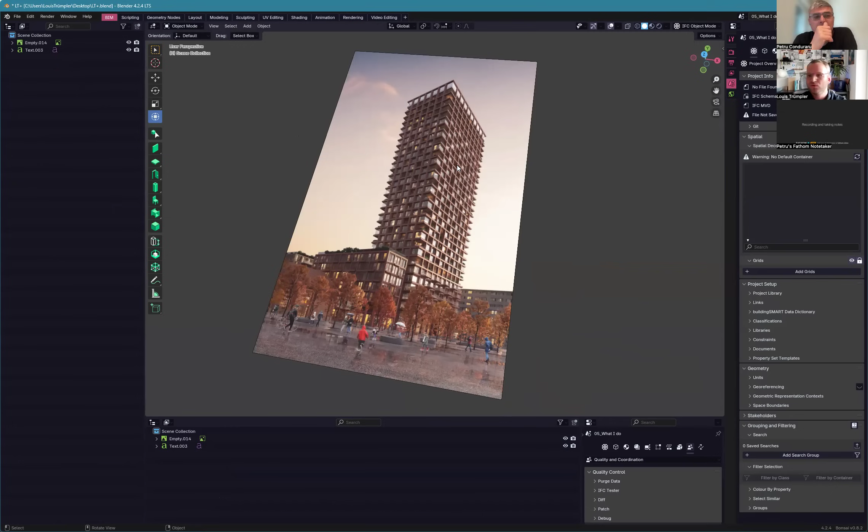But I do still work on some pretty large scale projects, not always involving Blender. But especially when I do BIM coordination and when I have to work with different models, I do like to involve Blender.

That's amazing. Some stuff is loading. I do work on some stuff that's not, I would say, inside Blender, but that's adjacent to it.

I've put a QR code so people can try it out if they want to. You can scan it with your phone to get to an app. It's a live site. Let me try, let's see if this works. Inception inside Blender, Hack LT plus CH. Okay, there you go.

What do we do here when I have to load the model? Do you have any models in the library or do I have to upload one myself? You can upload one yourself. It stays on the client side, there's no backend or anything like that.

And what it does is it basically performs ray tracing. Ray tracing is this concept where you can find out where there's adjacent stuff or even clashes, and this is for the timber industry.

So it was part of a hackathon, but it's built around finding the intersections between different model parts, because those are actually quite interesting for the timber industry. On the construction site, they have to connect these two things, so there's usually cost involved and they have to schedule that.

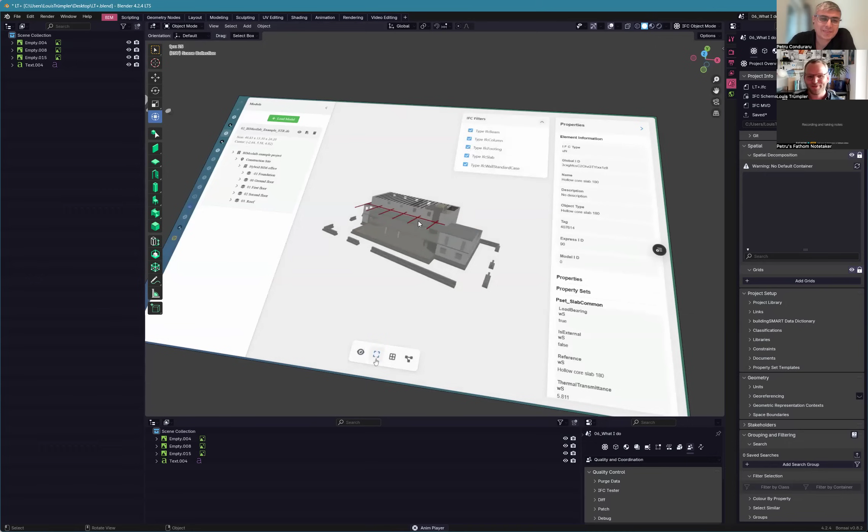Yeah, it's much easier nowadays with all these things, and training like Bonsai Bootcamp helps you get there in a few months, a few weeks, if you show up. So you say something interesting - 8 years, did you start using IFC OpenShell before Bonsai was published by Dion?

Yes, actually I started using IFC OpenShell before I used Bonsai, or BlenderBIM as it used to be called. At first, Blender was mostly like a user interface for IFC OpenShell for me. But that has changed quite a lot, especially since I don't work at Walt Galmarini anymore, where I had access to all the licenses.

Okay, let me share my screen. Don't forget this idea, it's important to continue it. Never mind, Blender has crashed. Well, part of the life.

At Walt Galmarini they have all the shiny BIM tools and all the licenses, but for myself I think it's quite nice to have free tools actually that are free to use. I've started using Blender more, and I've actually started modeling stuff with it - in Bonsai mostly.

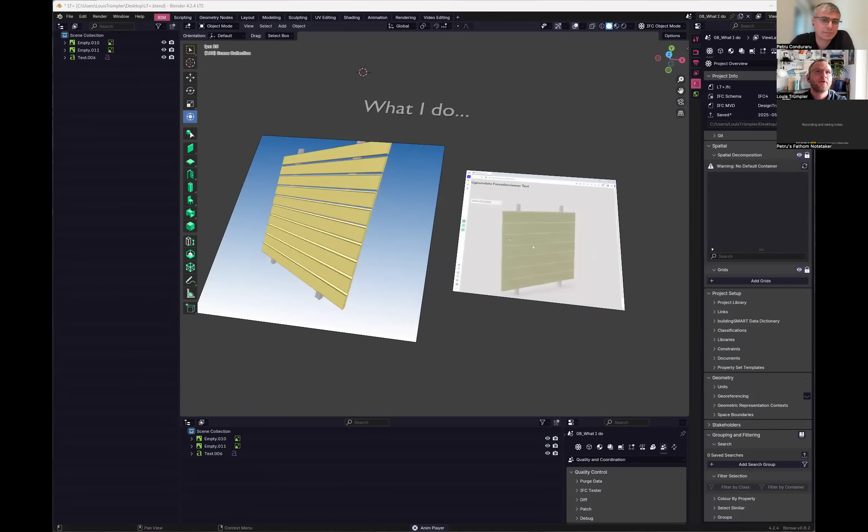There are many people, unfortunately, who just take, not even recognizing that they take. I don't want to be negative, but it happens. I am aware of that. What I'm also aware of is that I'm in a pretty fortunate position, so I do feel like I can share stuff. I can even, for the most part, decide what I'm working on, and so I like to share if I can.

What do we see last here? I'll actually show how I modeled this. That was a project for the Swiss timber industry with many different facade types. I wasn't aware of it, but those facade profiles are standardized, and there are like 150 profiles or something like that, corresponding to a physical tool that can make this shape out of wood in factories in Switzerland.

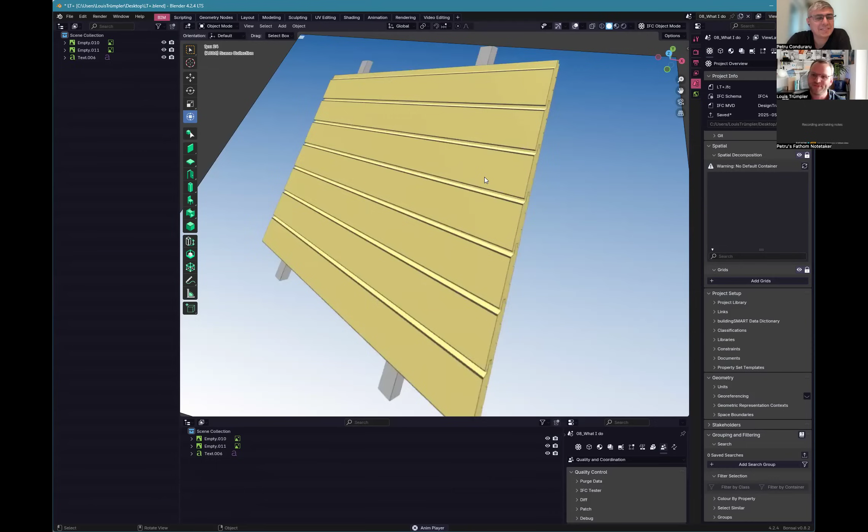The Swiss timber industry, actually Lignum, they're called, this organization, they have an online catalog of this data, and they asked me if it would be possible to have digital representations of their facades, and also nice pictures of the section cut. I immediately knew this would definitely be possible with Bonsai, easy, piece of cake.

I made them a good offer because I also knew I would be able to automate it quite a lot. So we produced 150 highly accurate facade models that can be downloaded on their web page now. They have a huge catalog.

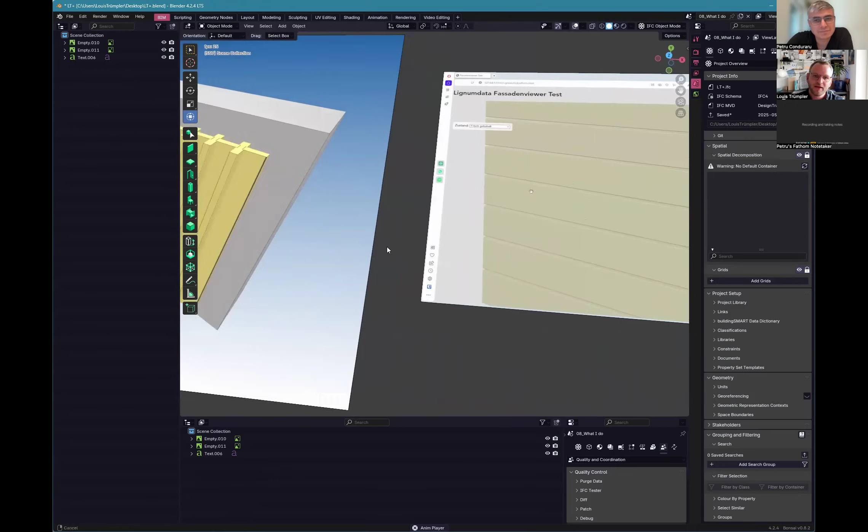The follow-up project isn't really progressing, but that's okay, I keep thinking about it. It's like to have a 3D viewer where architects and owners can look at the facade, and then we have a dropdown where we have a fake weathering effect.

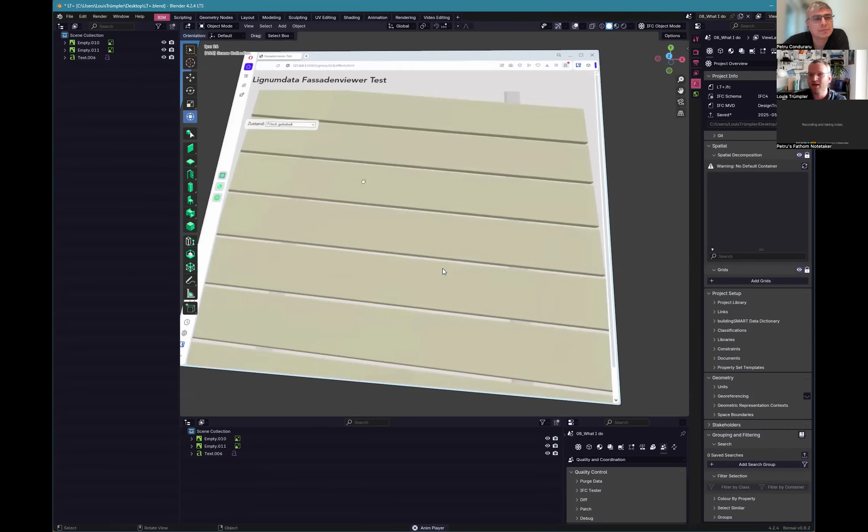It doesn't really look good here, but the concept would be to see what your facade will look like in 10 years. There are different ways to treat the surface, and those treatments have a high impact on how it's going to look in 10 years.

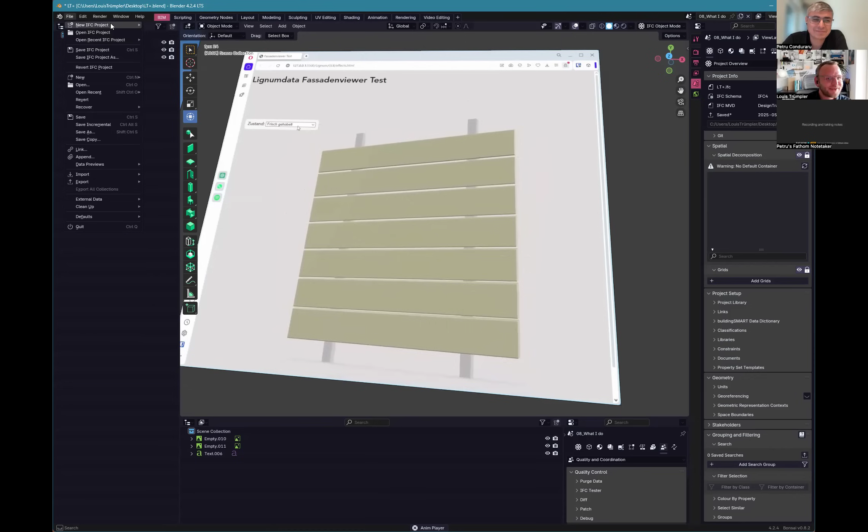It's quite cool what you can actually visualize there, but it's more for architects or visually inclined people. I feel like I'm already showing stuff for too long, let's jump into some actual projects.

What I wanted to show was first how I created these facade models. It crashed again I guess, and the screen share stops automatically I guess.

While you're starting this, what do you think about who Bonsai could be useful for in the AEC industry? Who could use Bonsai?

I feel like there's a pretty broad spectrum actually. Starting with owners might be a bit counterintuitive, but having a free tool is actually worth a lot if you don't work with BIM every day. There are what I like to call serial builders because they build one project after another. But most owners are not building multiple projects, and if they want to use BIM, having accessible open software I think is worth gold.

Then again, I start to see more adoption in the classical AE, architects and engineers. But as we all know, our industry is kind of slow to adapt. Where the benefits are very clear, even today, is around management and coordination. As much as I like modeling in Blender, what I'm showing now is not an everyday job, even for me, I'm not doing this every day.

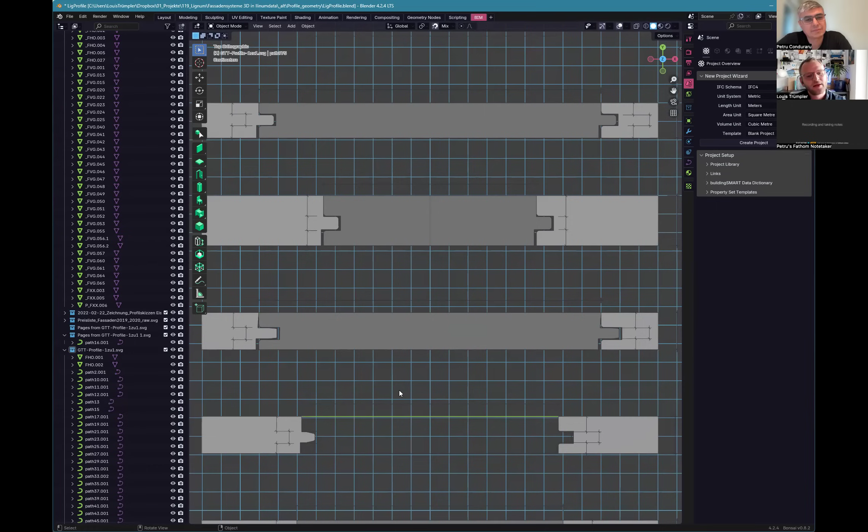But I realized that what we're looking at here is a profile, and IFC has this concept of profiles. So if we have a steel beam, it can have different underlying IFC profiles that give the shape. And I realized, how are these timber facades different from steel beams? They're not, and they should use the same approach.

I wasn't able to do it with pure Bonsai BIM tools, maybe because I didn't dig deep enough, but I think it doesn't actually exist. So I wrote a script that converts these curves into extrusions. Then I also created arrays of these extrusion elements, so that in the end I was able to generate those timber facades pretty much automatically, but still with some light afterwork.

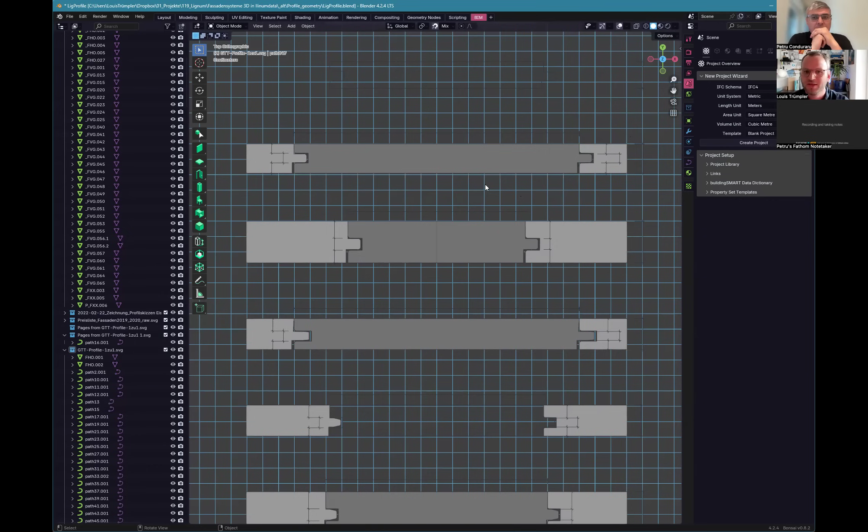I think it's cool that you can have add-ins in Blender, so I also started building an add-in for that so I don't have to run the script each time. After some more work, what I get is these facade parts, consisting of different claddings. I think it's really beautiful how the IFC schema has these concepts that then get applied in Blender and in Bonsai.

One of those concepts is an array - so that's actually an array inside the IFC schema, and it's quite crazy, you can edit it. If I go here and set the array to 17, you can see how the array happens. I could save that as a new IFC now, and it would be perfectly valid.

As you can see, I opened the IFC project because I saved them as IFC, and then I can just open them from here, and I have those facades, all arrays. Arrays can go in multiple directions - here you can have only one profile that you arrayed in two directions.

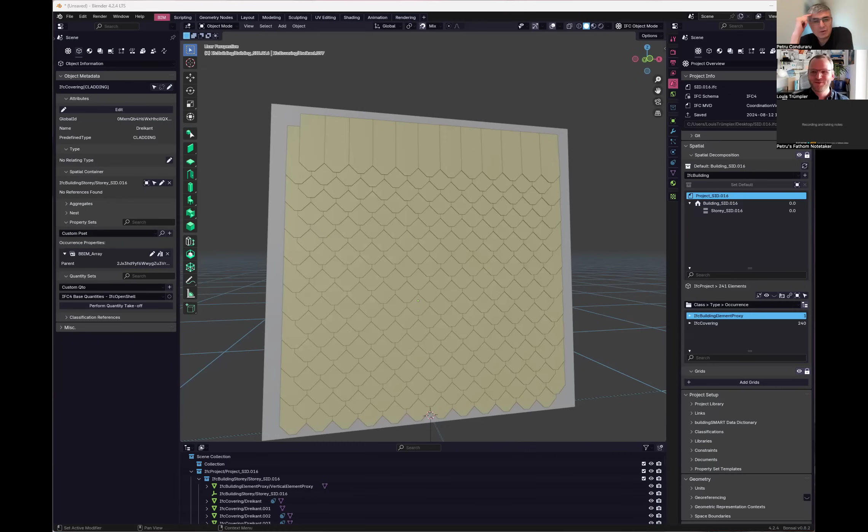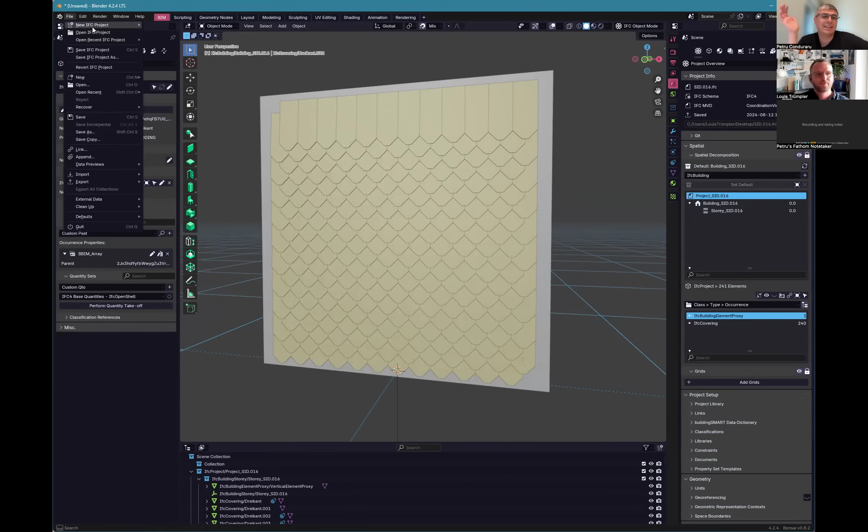It should only be one profile, and that should be referenced, the IFC way. Those files are really light. Yeah, but this sounds amazing in practice, theoretically at least. But this works when you use Bonsai as an IFC authoring tool, or an IfcOpenShell. You cannot expect this if you just export from other tools. I don't think there exists any other tool that comes even close to emulating it. They are emulating the IFC schema and supporting it to that degree.

You can export like an array.

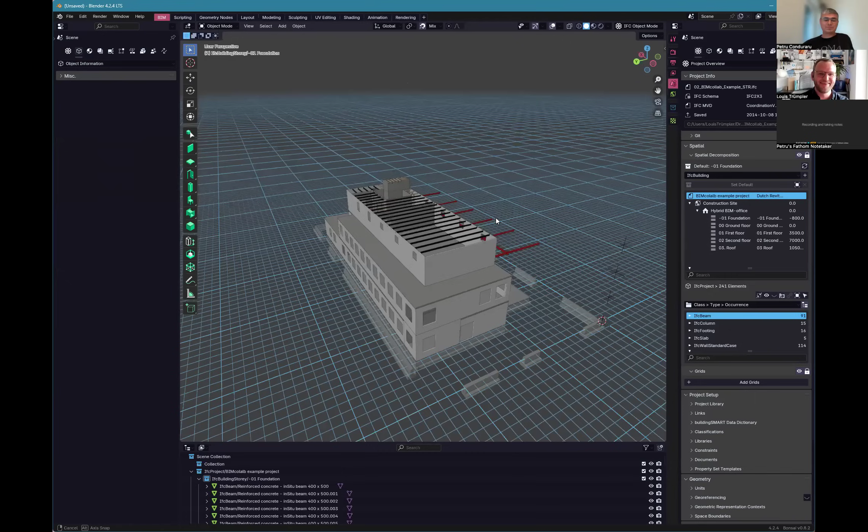That's an excellent segue into the next topic I prepared. Don't worry, it's the last one. It's around BIM coordination and management.

I unfortunately can't show any live models, but I do like to work with the BIMcollab ones. I don't know if you know them, you can download them. I quite like it because those are real models from Revit, and you can actually see some stuff there.

That's not an insult on BIMcollab, that's just the way it is, and I think it's good that it's like that, because if you work with sample models and they are perfect, I think it's a bit critical, because usually in our industry nothing is perfect when it comes to IFC, especially.

You have a very elegant way of putting things, man, I'll give you that. Very friendly way, you are a true diplomat, unlike me.

One reason why I like to use Bonsai, and even why I started using it more, is because traditional BIM viewers have some limitations. And again, not to talk down on anyone...

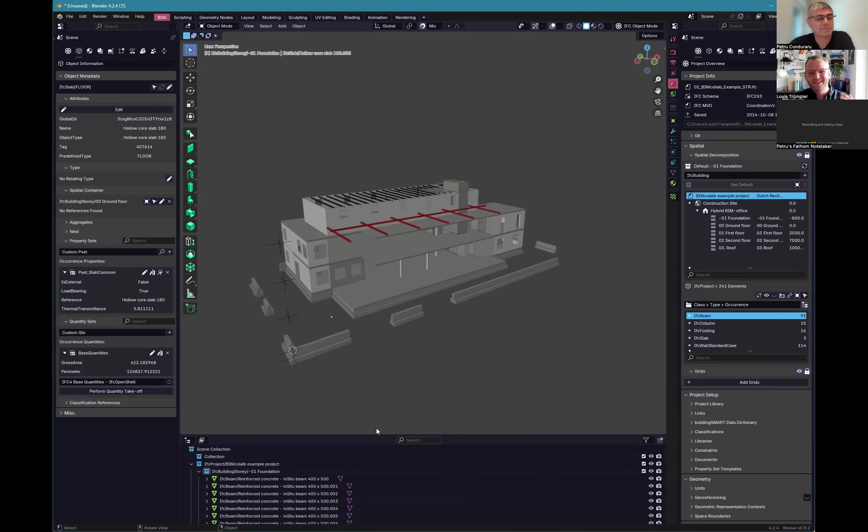But I don't like to do stuff without telling them, because I think they should know that somebody did something to their file. They should also get contractually the option, or at least know what they're doing wrong, so they can get better. And then also we do have to put some pressure on the authoring tools, improving.

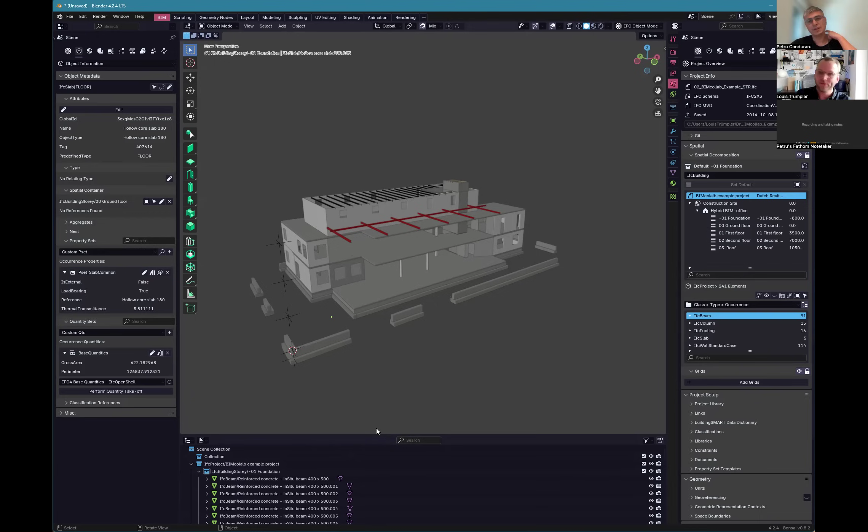Yeah, yeah, that's true. So I also like to always give feedback back to them. That's a great mindset, man, I admire that. That's the right way to do things.

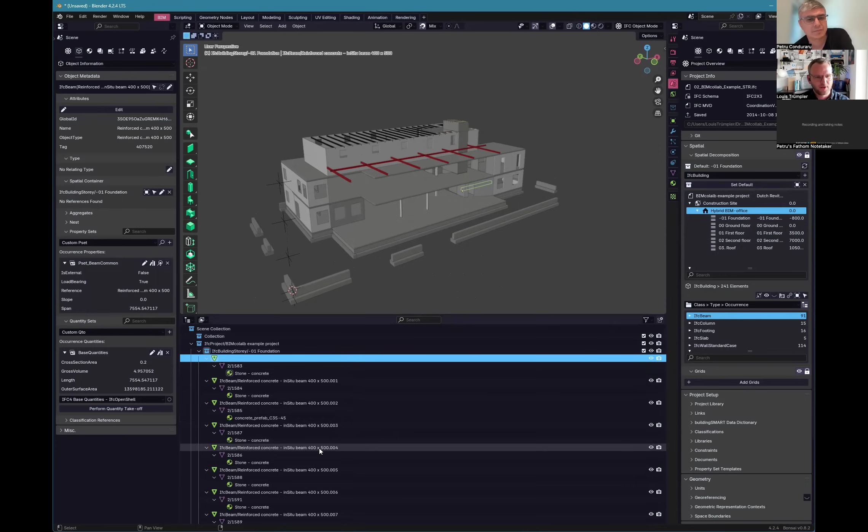I completely agree. So yeah, I open the outliner when I get new models. Actually, when I get new models, I like to check some basic stuff. I usually open the outliner, then I do Shift A, because then I can... twice.

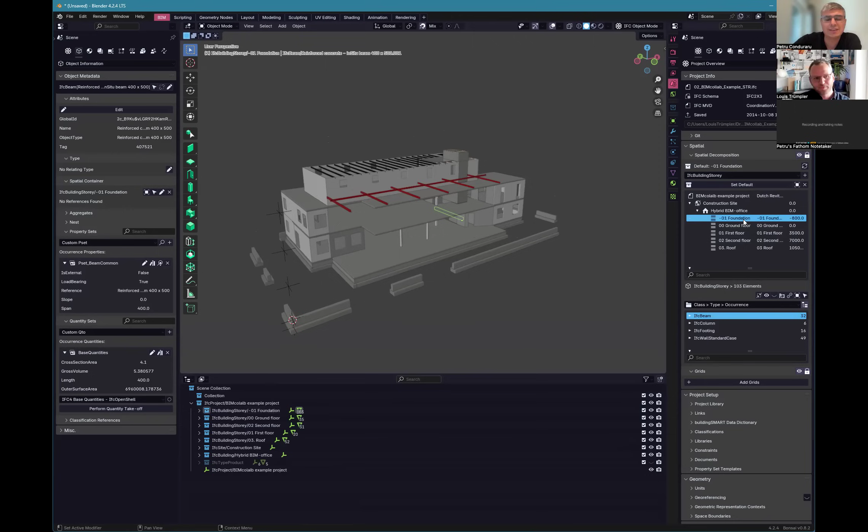You don't like how it's presented? It takes me a lot of time... I mean the Bonsai user interface. If you look on the right-hand side, in the spatial decomposition in Bonsai, I have a look at cost, properties and stuff. I have to see what's on the IFC building, what's on the site, etc. Maybe add stuff there, and I think that's really cool inside Bonsai.

What might be a bit misleading, but you definitely know this now, is that there is no proper spatial decomposition in the scenes anymore. You see, you have the IFC project and the collection at the same level. This used to be different before, but they decided to just keep it as normal, as working in Blender - just have all these things at the same level, while building the user interface on the right hand side for Bonsai.

I quite like it, it's very strong, and you actually can do the same things, but it requires a few more clicks. You can click on that, select the beam, and even select the space and see the properties and everything. So I like how you also have the user interface - that's exactly how I also have it at work. I have to add the bottom screen.

What I don't like here is that I would have liked sometimes this scene collection part, like the outliner - it's also long, you know. So I would have preferred to have it also vertically, but then you end up with too little in the middle for the model space, you know. I know you can do that, but I sometimes switch.

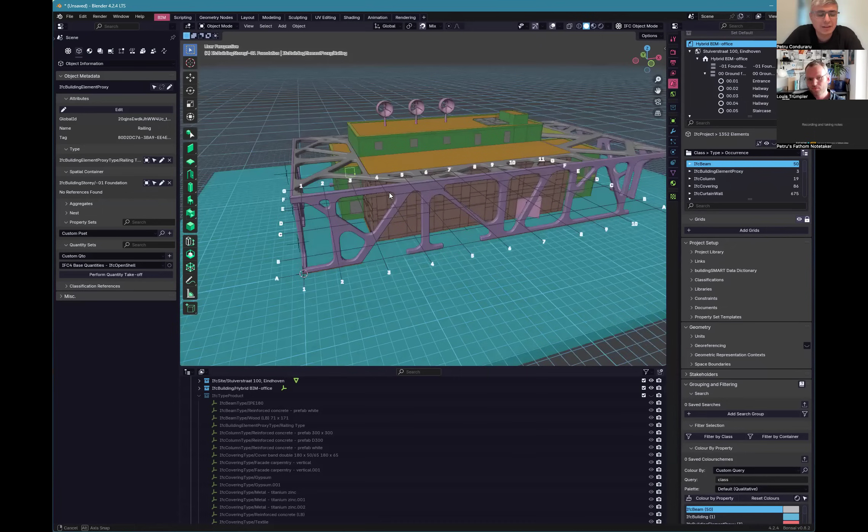This is the first thing I do all the time. I immediately see and it's easy to spot the building proxies and go through them.

One more thing we can see here is that we get the axis and all the information on it, that this is number 8 and it runs in the same sense as the others.

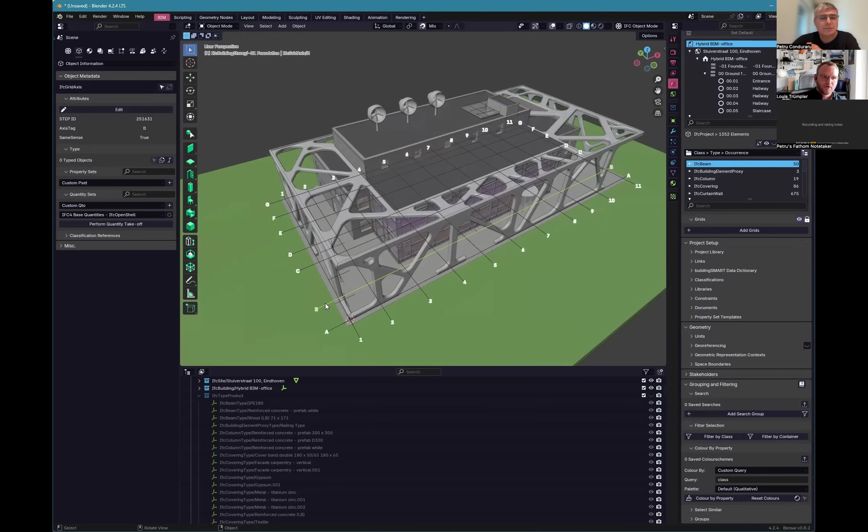But is this shown in Bonsai like in BIMcollab Zoom as well? I'm actually not sure. I think it's shown in Solibri, but I believe in BIMcollab it's not. Maybe not supporting IfcGridAxis. I'm not sure, to be honest.

I only have one last note, and that is another favorite of the BIM coordinator, I would say, and that's a bit hidden in the debug, the geometry stuff.

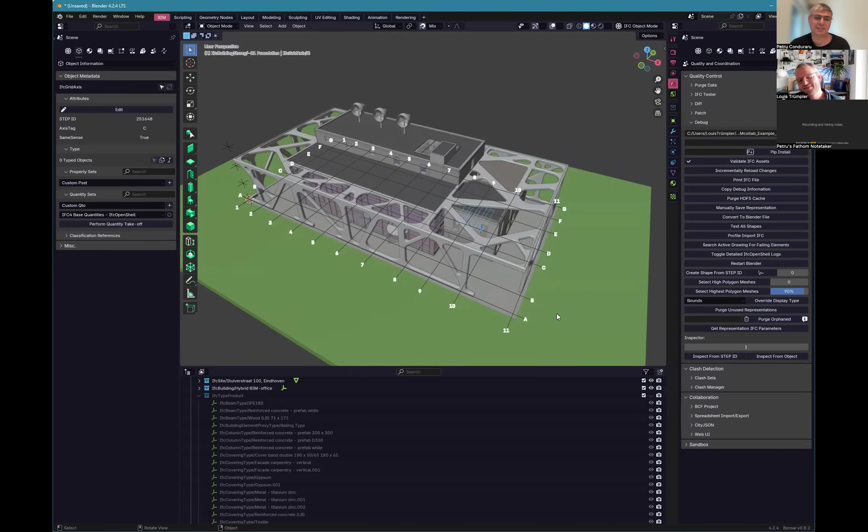Select highest polygon meshes, to see which things have the most. If I do Shift H, I can see that there's some furniture, and these things are getting the most space in the model. So most of the time, they are also irrelevant for the build from a building point of view, right?

Exactly. What I like to do is go to like 40% and select what's there. And then it's interesting that we still only have furniture and railings. Two objects, usually like tubes, because they have the geometry in IFC, it has too many lines and points, vertices.

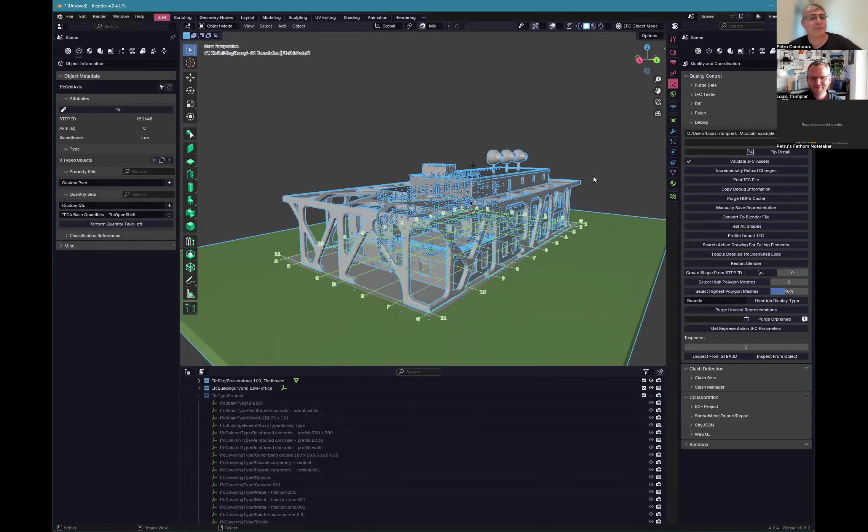And so on, because I think they are not parametric IFC objects. They might be in the tool, but when they get exported, I think they get turned into meshes or B-reps or something else, I could be wrong. Definitely true. And if you look at this, you can see here already, it's one object.

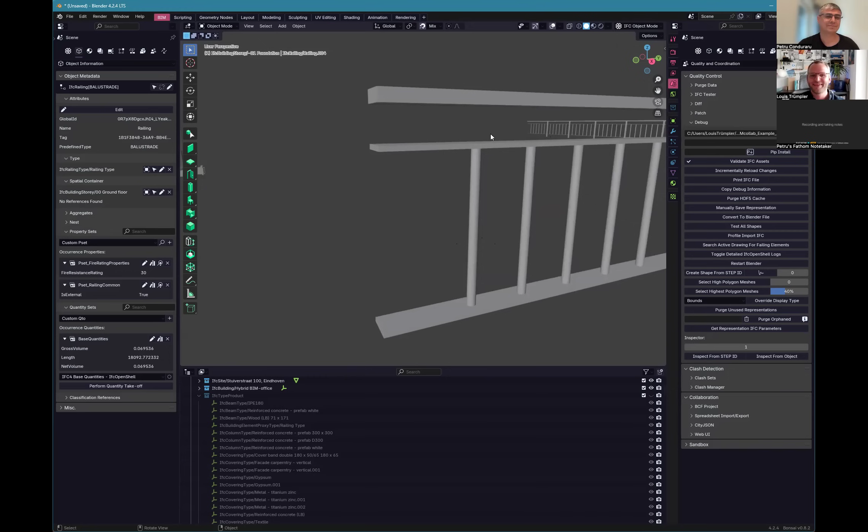This is not amazing, but I think now we know how these things should be built. If we think back to the profiles, that's exactly the same thing - these are like extruded profiles, and then it should have one type for like the round thingy, and every other instance should just reuse that.

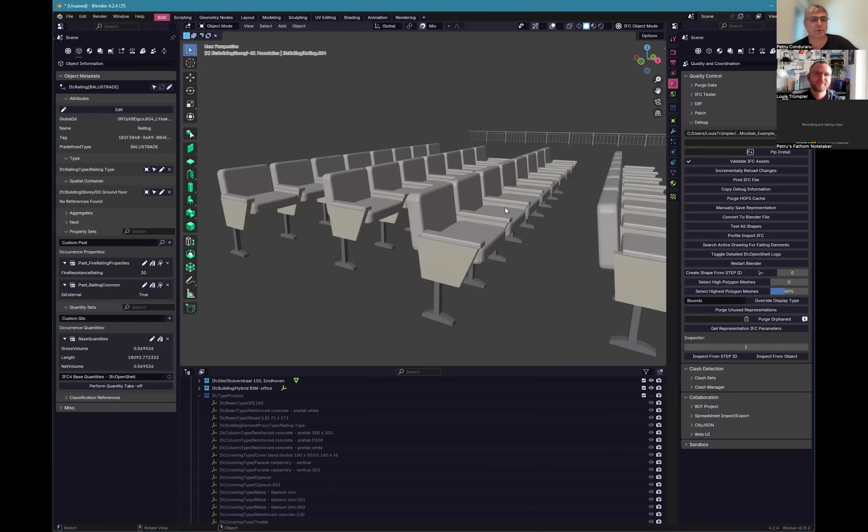That's easy to do when you really do it like native IFC, right? But when you get it for real, I have no idea how this would work if you export from another tool. I think that would need quite an advanced customization level, but I'm not sure even if it's possible to custom this degree so that you get it properly in IFC geometry. I'm not sure, it might be possible.

I think sometimes you can have an impact trying to model cleanly and to use the correct authoring tools, like the correct tools that Revit offers you for family creation, and same in ArchiCAD. But then again, you're still at the mercy of the tool when it comes to IFC export.

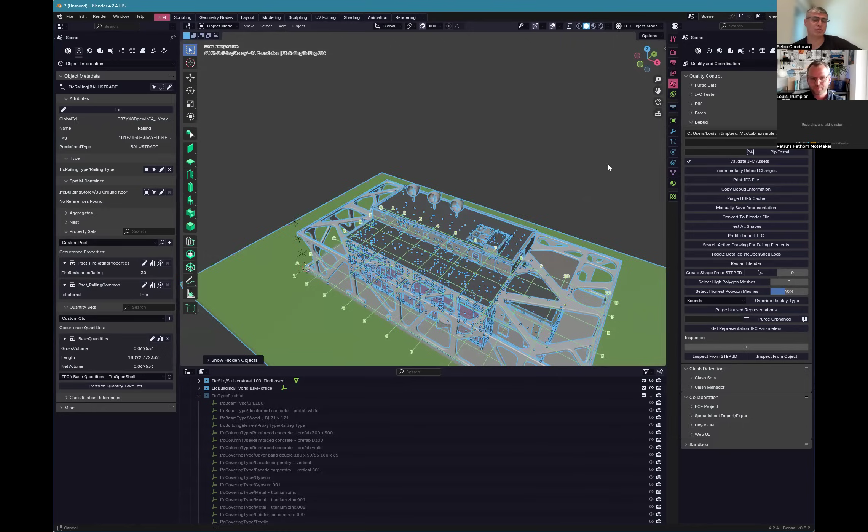Yeah, interesting, very interesting. So what I've seen so far, you showed some use cases of modeling, but I've seen more from a point of view of auditing, validating, checking the models.

Bonsai is an amazing tool. Even if you are using BIM Collab, Zoom, or Solibri, you can still get a lot of value from using Bonsai because compared to the other tools, they are more effective, quick, you get support. But Bonsai shows you exactly how the information is - you don't make any confusion when it comes to IFC schema. You see exactly everything, and the extra things that other tools don't support, like the profile stuff and these types. And let's not even talk about 4D and 5D information, if you want to go crazy like we do in our bonsai bootcamp with these kind of things.

Did you ever use IFC OpenShell or deal with timing and scheduling? Not really. I've looked at it, and I see how tools are starting to adopt IFC task and stuff, building your schedule from the model, having visualization. A lot of potential there.

Just one more thought back to what you said around having Bonsai with this ability to audit. I fully agree, but isn't it amazing that the same tool can be used to model from highly scratch precision stuff, perfectly in accordance with IFC schema - it can be used to even create animations on an industry standard level, not like some beginners tool. I would say it's amazing how the spectrum that Blender and especially Bonsai covers is truly amazing.

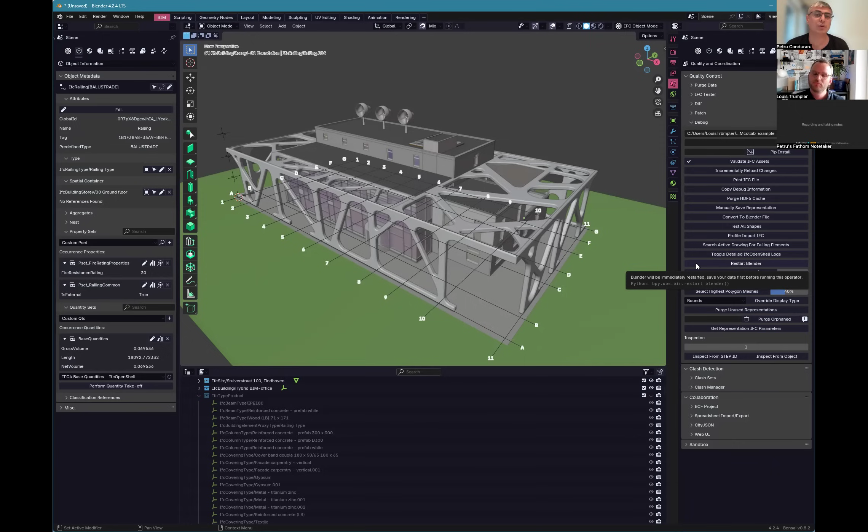You are going to go through many obstacles, you are going to get many errors, especially if you deal with drawings, you are going to be frustrated. But at the same time, these things are improving all the time, and you can get help, you can ask people - there are so many people more than happy to do that. There are many things you can do, but yeah, it's a bit different than just using the tool to open models and look at them and coordinate.

That's why I always recommend, hey guys, if your priority is not to replace Revit - again, I don't know how that would work in a larger practice, but for individual people, individual companies, it's possible. I know we have two in our bootcamp, there are three actually, and there are more people interested in that. It's possible, but it's not easy, right?

So that's why I always recommend you start easy, get used to the user interface with Bonsai, what it can do, and look at models and how the IFC schema works, and then build on that, so that you don't give up. What you have here, you have a gift.

That's like my last thing I wanted to end with. Let's not take these initiatives for granted. I think it's amazing that people put so much work into this, keep developing, and keep maintaining a community. It does take some money, and it takes a lot of time.